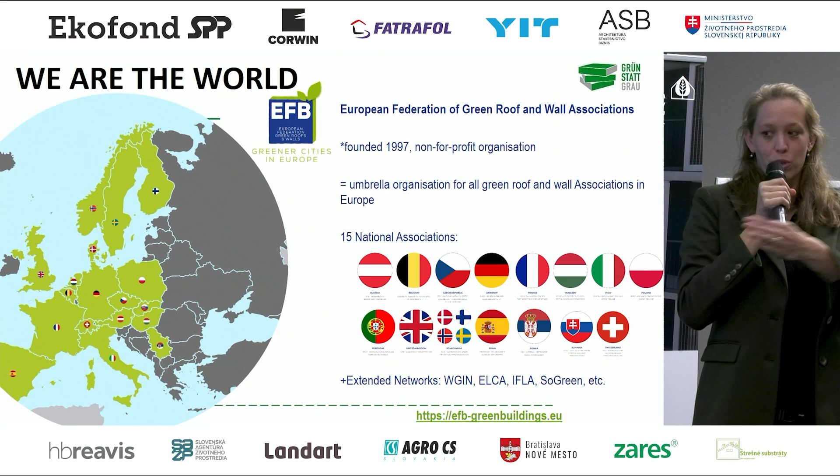So we're representing the Austrian-wide network and coordination center for greening buildings. Beside that, we are also the office for the EFB, which was already mentioned by Dusty before. We are represented in 15 other countries with the European Federation, and we do a lot of exchange, like we've already experienced here with the standards and the certifications and events and so on.

Some highlights of the achievements of GRÜNSTATTGRAU. Looking in the past, the Austrian Association was founded almost 30 years ago. The European Federation almost 25 years ago. Our first green roof standard was published in 2010. Currently we are rewriting this standard to implement green roof standards for biodiversity green roofs, solar green roofs, and a lot of things changed or developed in the last 10 or 12 years.

We are currently working on that. In 2017, the indoor standard came out, and last year we published, with the Austrian Standard Institute, the first green wall standard. As far as I know, we are the first ones in Europe, but also in the world.

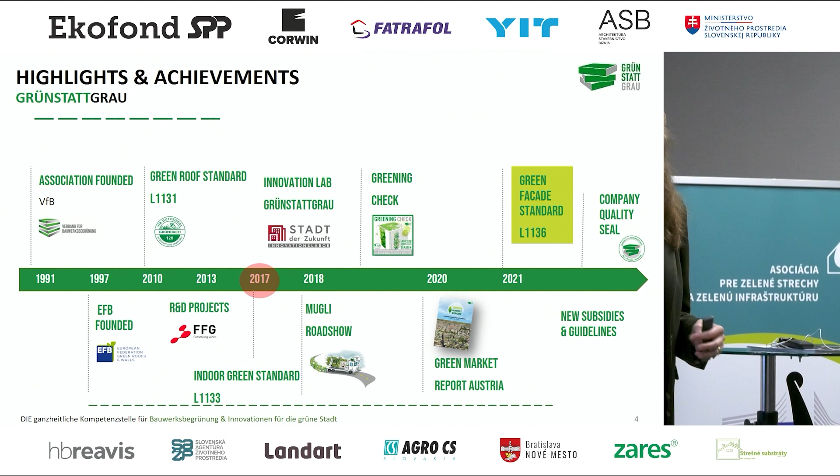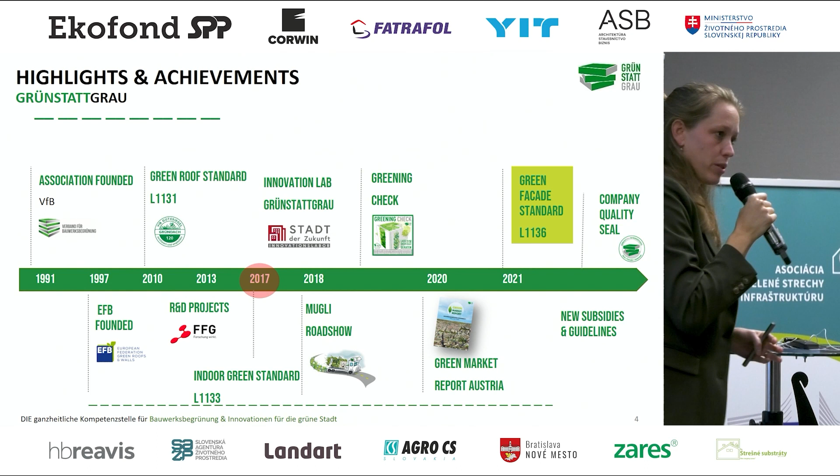Pavel already mentioned it, we started to have a look at our green market in order to provide decision makers with data, to show them that the green roof sector, the green wall sector, is actually actively doing something for climate change adaptation.

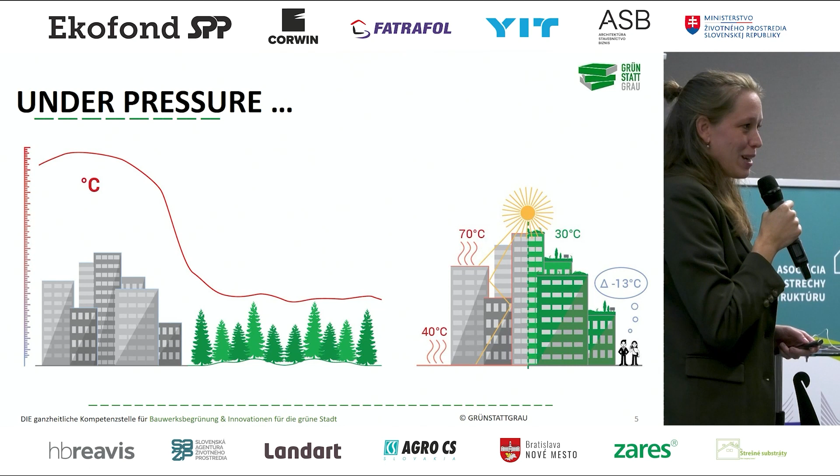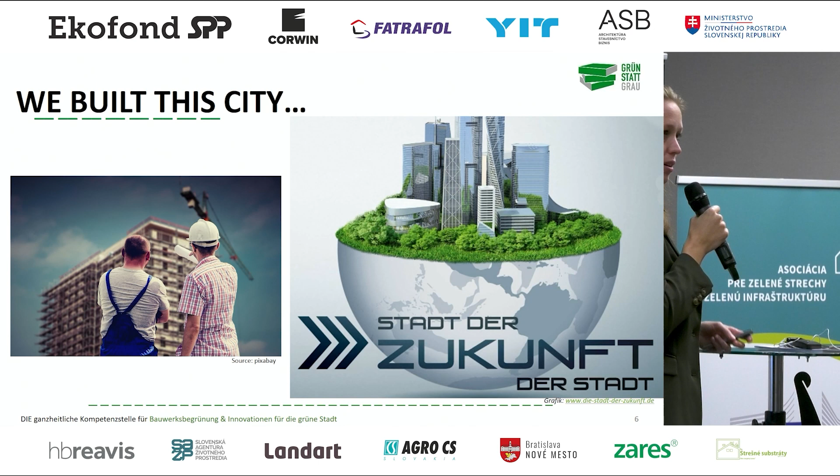As we know, we are a little bit under pressure, and all of you might have experienced it already, and I don't think I have to tell you all the benefits and effects of green roofs. But it's always others who did it. We built our cities, we created our own desert with black surfaces, with a lot of glass, with sealed surfaces and reflecting surfaces.

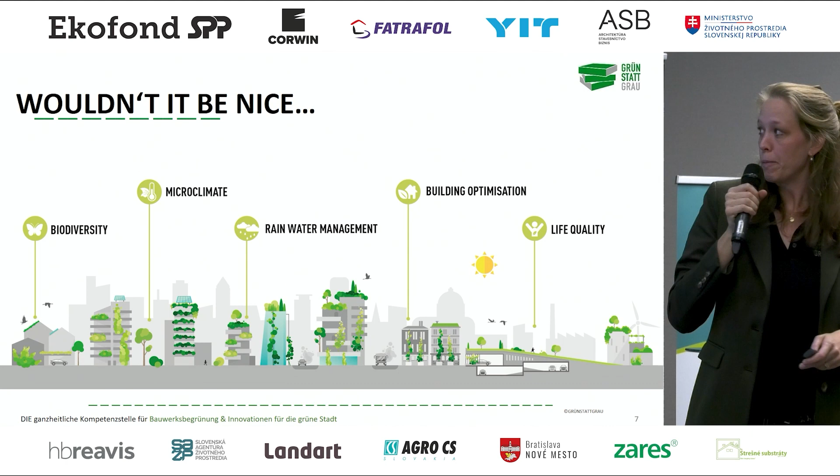So we turned our cities more gray than green. Wouldn't it be nice to bring all these green benefits we can have from nature-based solutions, from green-blue infrastructure, to our cities, to bring back biodiversity, microclimate, enhancing our microclimate, use it for rainwater management, and of course protecting our buildings to optimize the outer layer of a building.

And who else... we are always going to the parks to release our stress or going away on the weekend. So why don't we put the green into our cities, to the place we are living, where we are working.

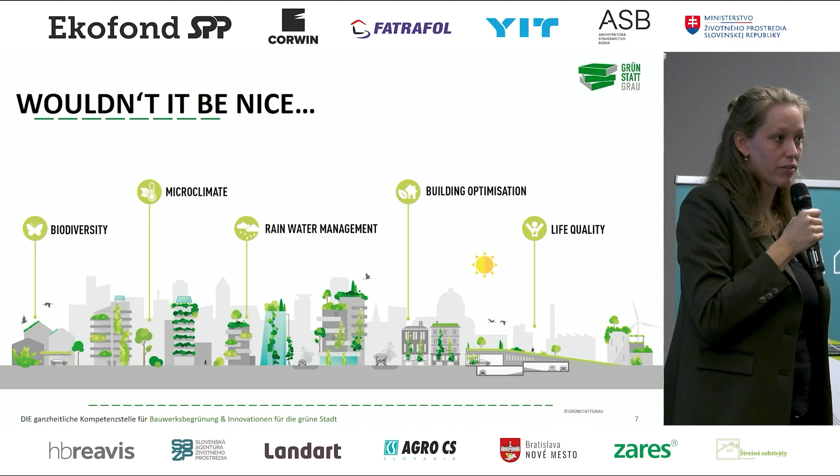And the summers are getting hotter. The prognosis is that heat days will double within the next 100 years. So, hot town, summer in the city.

We have already measured a lot. There are a lot of studies done in the last years, and we can see clearly an effect on how we can cool down with green walls and streets.

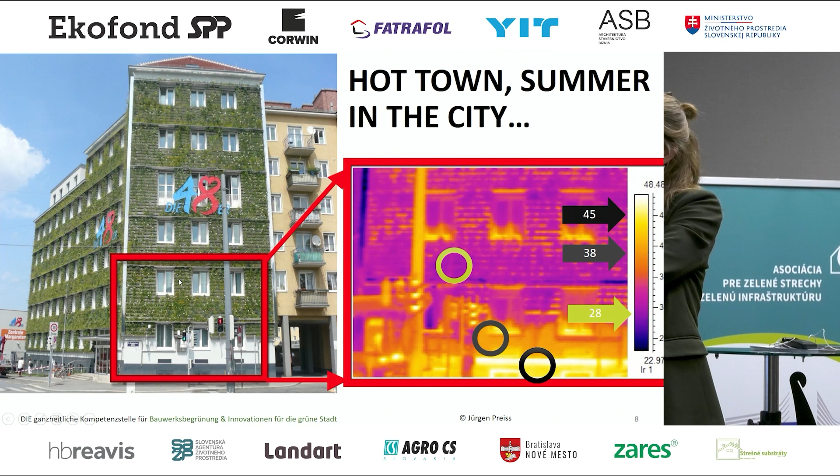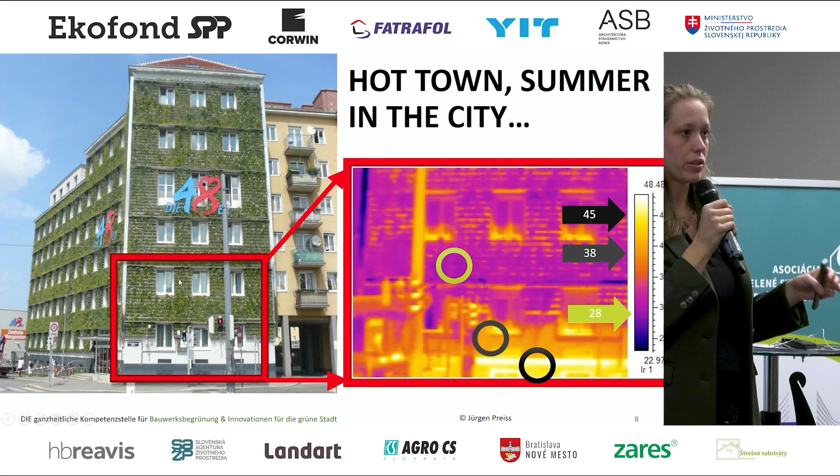The white facade also had a temperature of 38. So you can really see the impact that a surface, the color of a surface, can have on the heat island effect in a street.

And of course, it's all about the money. Here's a study done over 6 years in Berlin by the Technical University. They had the focus to decentralize the rainwater management and bring up green facades. They put on the facade 150 plant pots with 9 different climbers.

They had a direct comparison of an area where the building was shadowed by the climbers, by plants, and with a normal shadow rouleaux, which you can see here. The outcome of this 6-year study was that the running costs of the naturally shaded part of the building were way lower than those of the normal shadowed part.

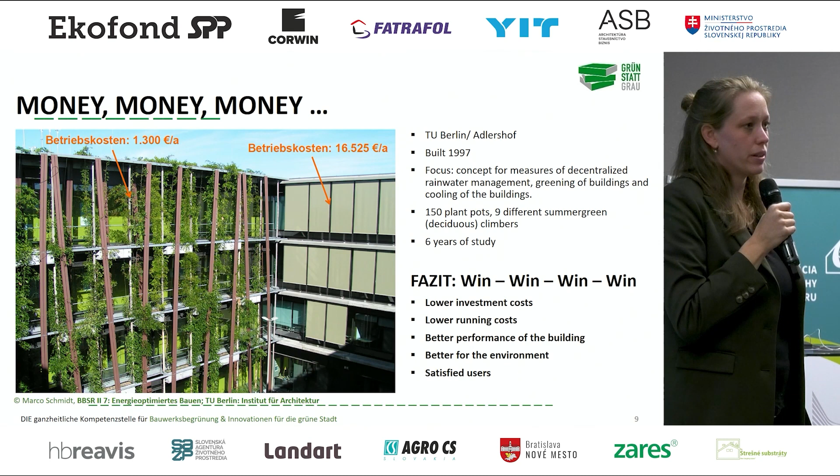So they had lower investment costs, lower running costs, better performance of the building, and of course it's better for the environment, and you have happy users inside and in the surrounding of the building.

And how will you know all of these benefits? We have summarized them all up in a document. It's in German, unfortunately, but you might guess or use Google Translate. They are all on our website in our download area. I have, I think, 2 copies here.

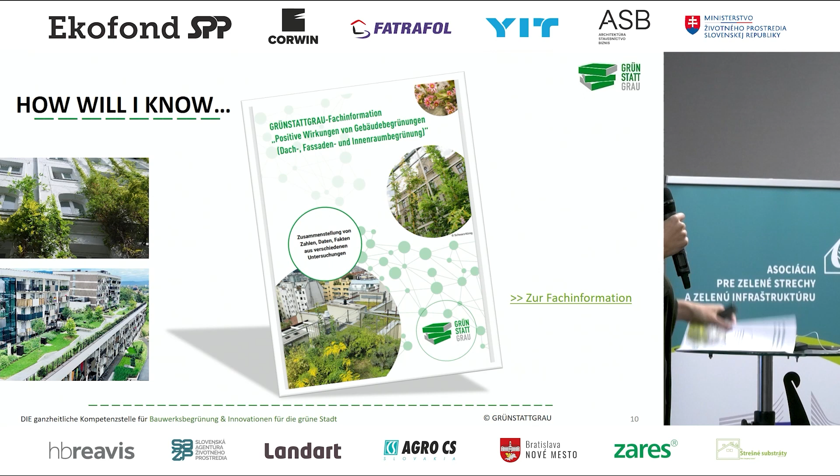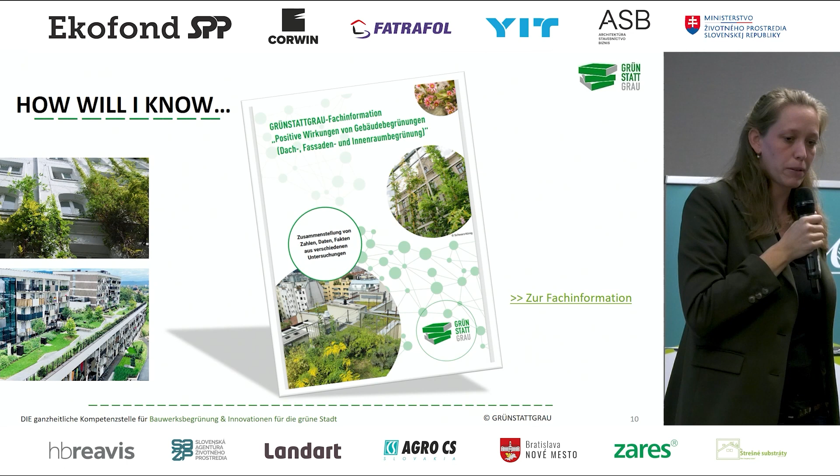So it's a nice overview about all the studies about green roofs and green walls, and also indoor green, which were done in the last years.

And of course, there are already a lot of people who are motivated, and they are doing something already. Some projects are coming to us because they need some help, or it's not working. So when you're planning green walls, it might seem complex at first, but if you have a short look at some technical stuff, or at what the plants need, then you don't have to be afraid of it.

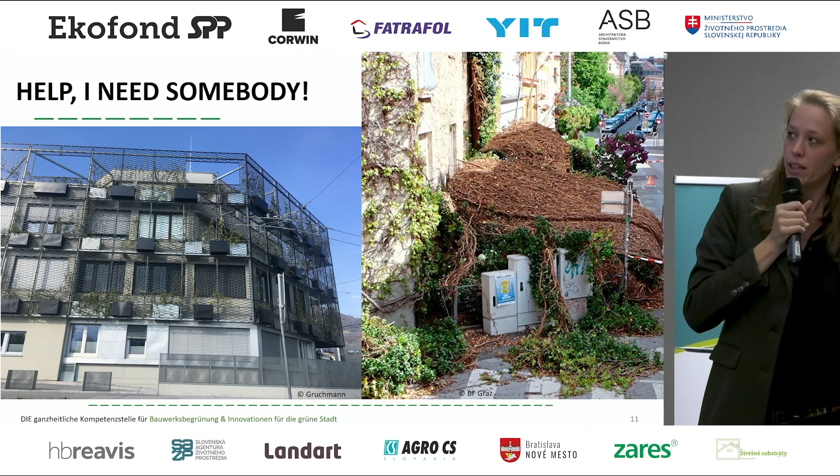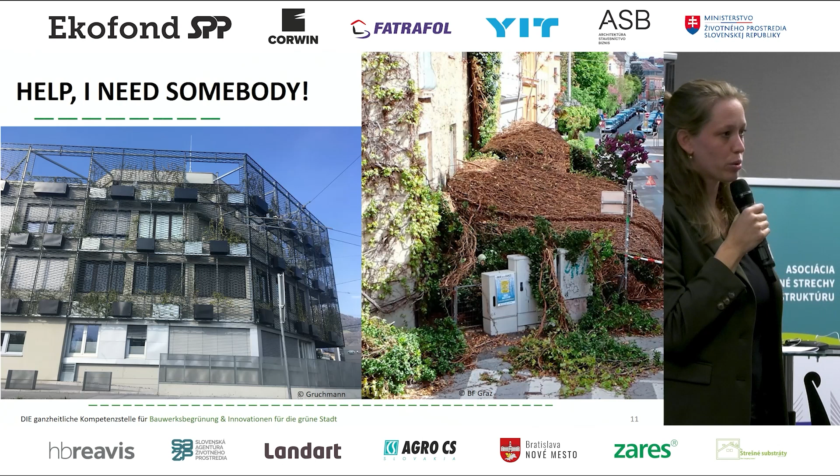But as we can see here, ivy—I'm sure you know the plant—is a plant you have to be a little bit careful with. It's avoiding sun, and it needs the facade, so it doesn't need any climbing trellis or something like this. Or if you do the maintenance wrong, you can have it all down on the street as well.

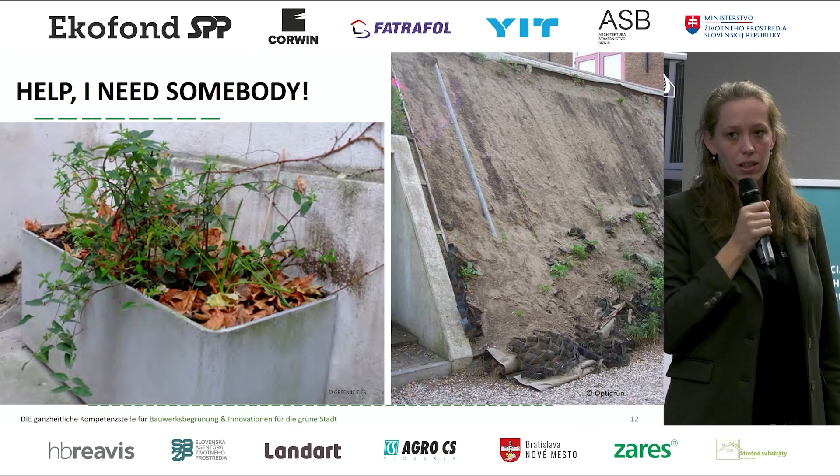And the lack of quality, or the wrong processes at the construction site—I'm sure you know it from green roof constructions—it's really important to have a look at the needs of the plants. Otherwise, they might think that we don't care about them. So you don't have to invest in a climbing trellis when the plant is a self-climber.

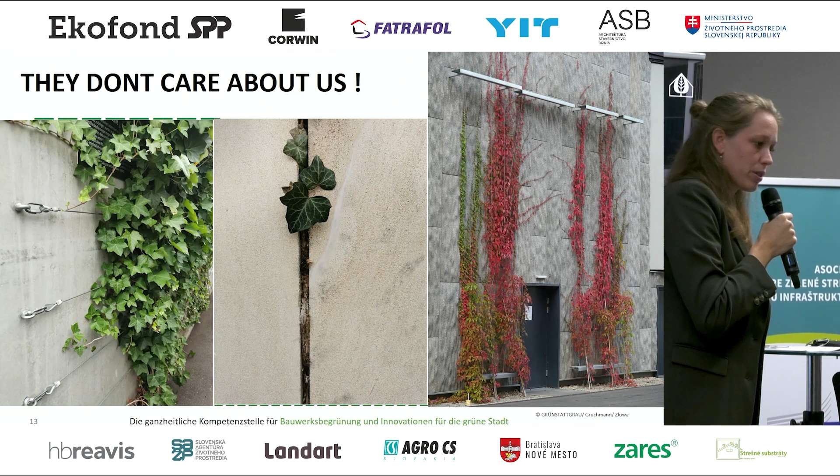There are also different species of plants you have to consider when you choose one. And the ivy, I come back to it.

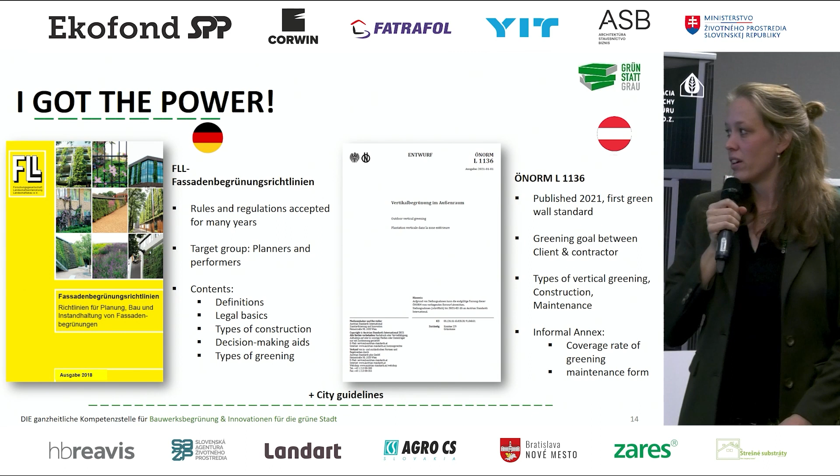So we've got the power, we have the standards, and I'm happy that you also have the green roof standards here now. And of course, there are a lot of city guidelines already existing about green walls, but also green roofs.

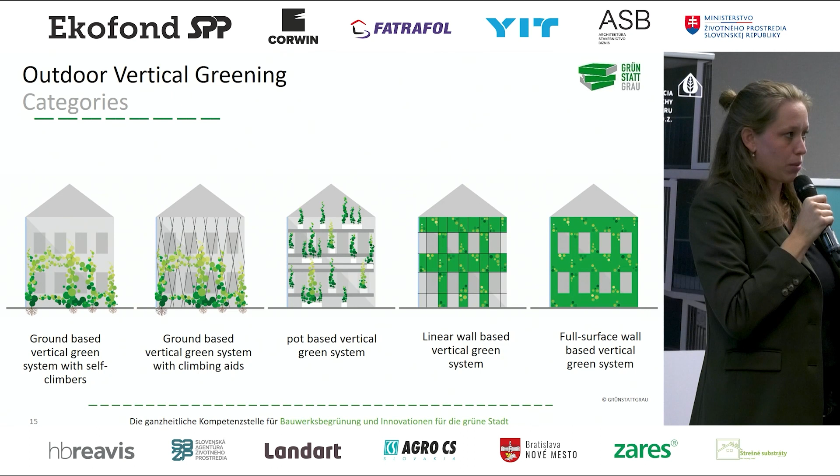So in Austria, we put them into 5 categories. We divide them into ground-based with self-climbers, ground-based with climbing trellis, pot-based green walls—either in the soil, on street level, or on the building—and wall-bounded systems, where we divide into linear and full-surfaced ones.

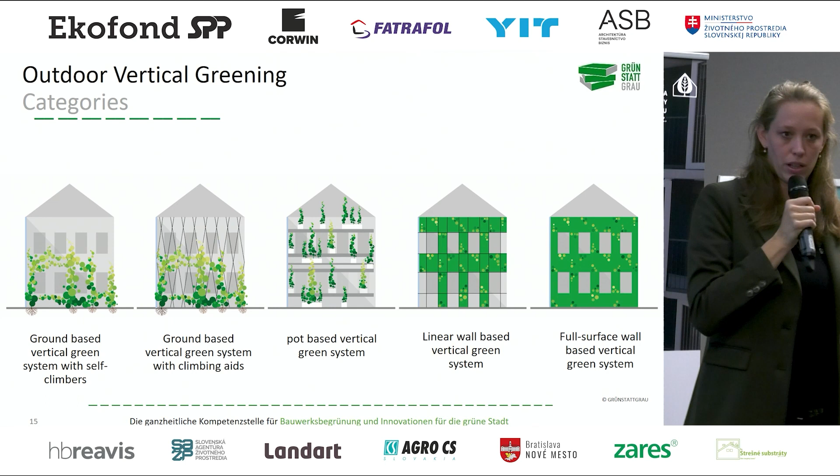So if you want to start your project, you have to check it out now before you start: what kind of space you have available, who is the owner of the building, is it also on the street side, do we have to involve the city, the exposition regarding rain, wind, sun, etc., the fire regulations.

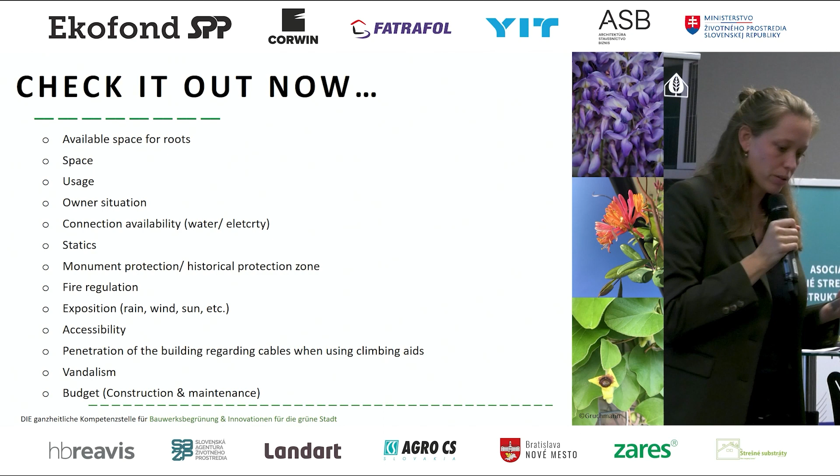In inner cities, you also have to face or check the monument protection if you're in a historical zone. The statics, of course, and whether any connections for irrigation, water, or electricity are available, or if you have to install them.

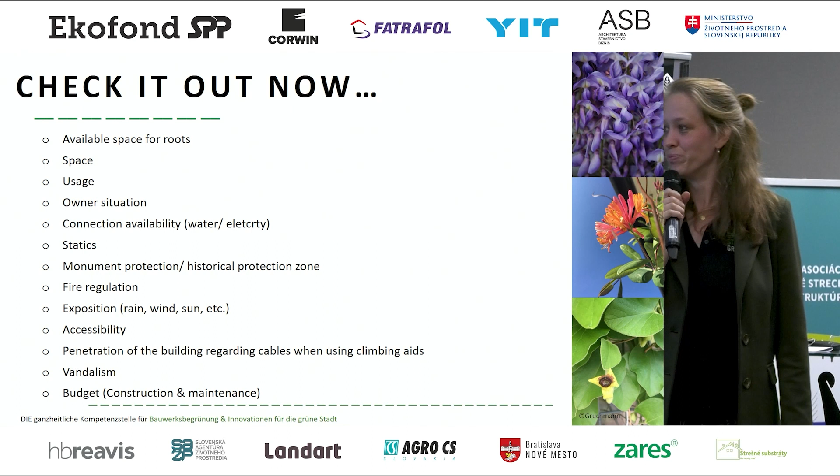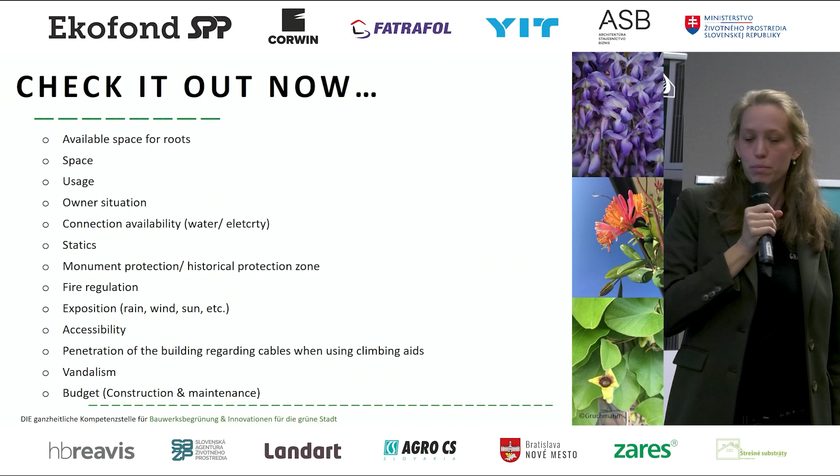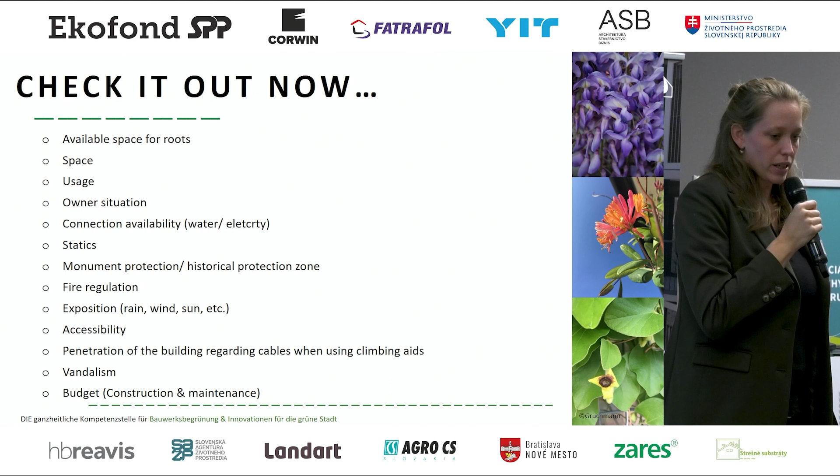For some places, you also have to consider vandalism. For example, at schools, they treat the plants differently than maybe on your house. There's also the accessibility, which can cause higher maintenance or costs if it's quite complex to get there. And of course the budget, either constructing or maintenance. Depending on these factors, you can choose your system.

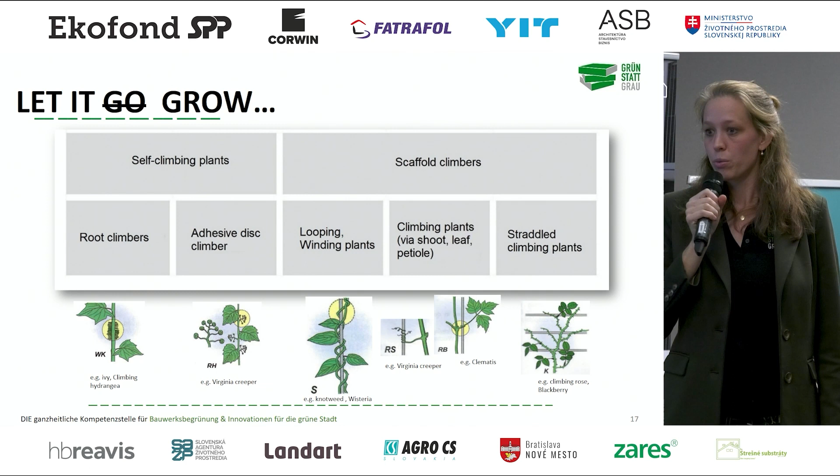One of the most used, because it's also low budget, is working with climbers. We divide them into self-climbers and those who need a climbing trellis. There are further categories depending on their growing habit, and you have to choose the type of climbing trellis, whether it's a rope, a net, or something else.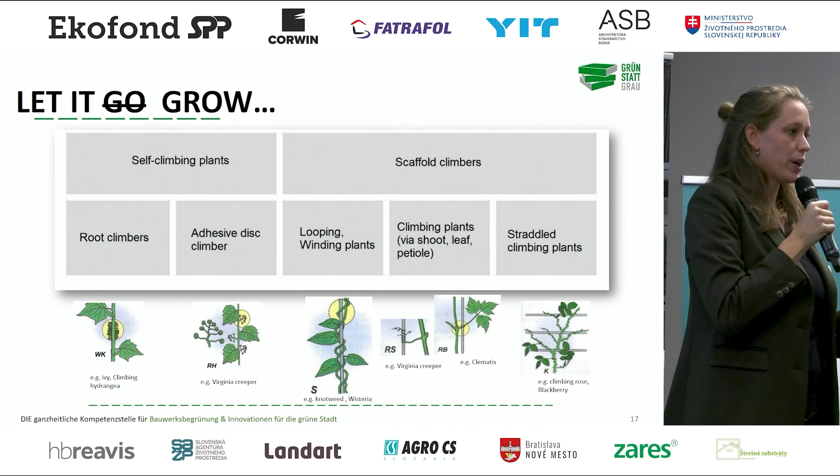And ain't no wall high enough. You also have to consider or be assured what your greening goal is, how high the plant should grow, and carefully decide what kind of plant you will use.

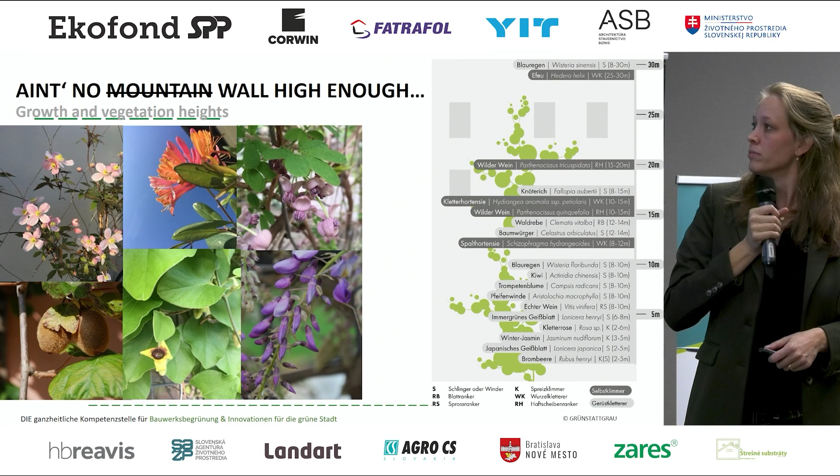Here we have an example from my hometown, Salzburg. It's ivy again, well maintained, shaped in a heart. They really love green facades in Salzburg. But you also have to consider that ivy loves dark places, so if you don't regularly check your ivy at home on your facade, it can cause damage because it loves cracks and grows inside them. But it's ecological — it's really an amazing plant, because you have birds nesting, blooming for the bees, and food in winter for the birds.

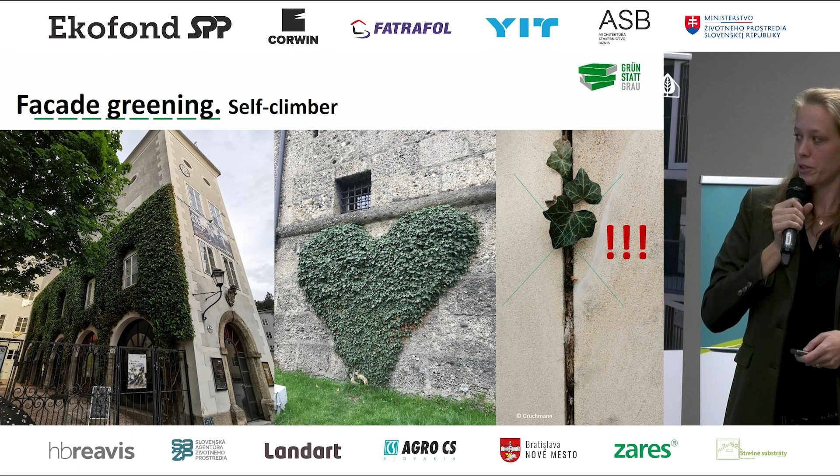Here we have an example from Vienna. In Vienna, you also get subsidies for installing green walls. First you get 200 euros for consulting, then up to 3,000 euros maximum for inner yards, and 5,000 for street-side facades. In Vienna, new buildings have to have 20% of their facade covered in green.

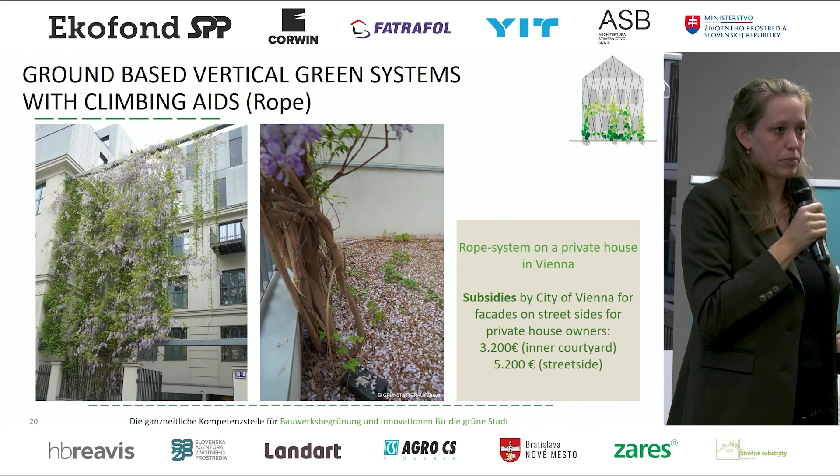Then we have this kind of plant pots. You might know it from your balcony — in autumn when you remove them, you put it out and you have a really compact shaped soil in your hand. So it's really important to use mineral, pot-friendly substrate. The layers are done like a green roof, and it has to handle heat and root pressure with plant-friendly substances. In case you want to optimize water retention in the substrate, we have geotextiles or other additional substances.

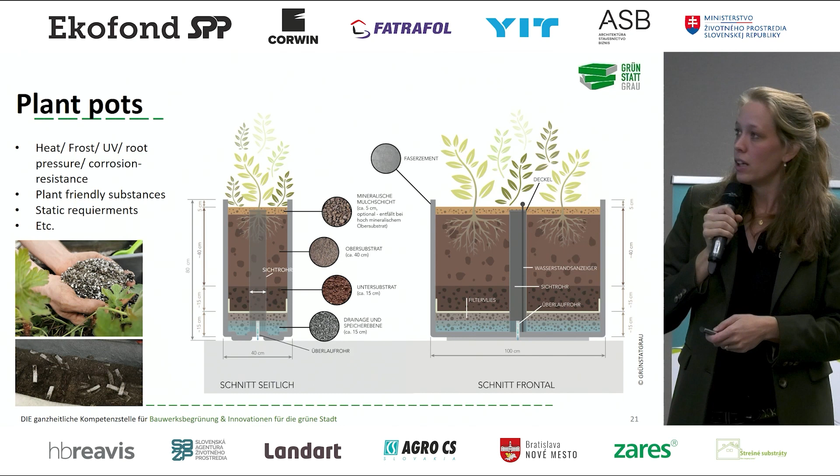This is actually a project where we sit together with the city of Vienna. We invited all departments who are involved, because if you want to set up or install a plant pot on the street side in front of your house, the process was really complex and no one wanted to give their signature on the paper. So we sat together, asked them what their criteria were for the plant pot, and developed the greening quality assurance. The different departments worked on optimizing the process.

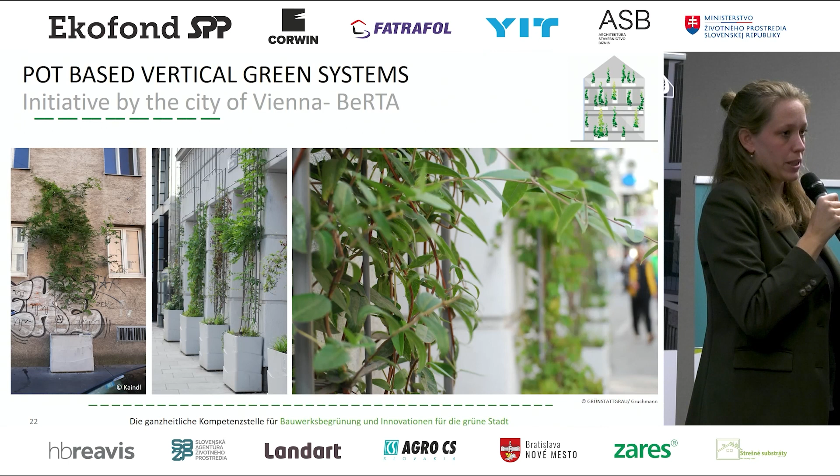At the moment we've developed a one-stop shop where, if you're interested, you can apply — we call it BeRTA, the plant pot. It's a very easy and fast process from having the idea to actually installing it, and we also provide all the planners or gardeners who install and maintain it. Here's another example of a pot-based green wall, showing how architectural design can be implemented in the climbing trellis. Tomorrow I will also show you another pot-based example where they put it up — there was no space on the ground level, so they put it up on the wall.

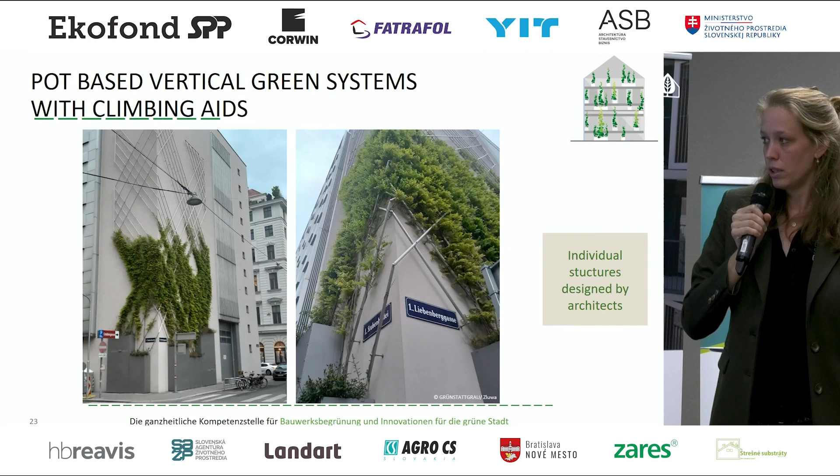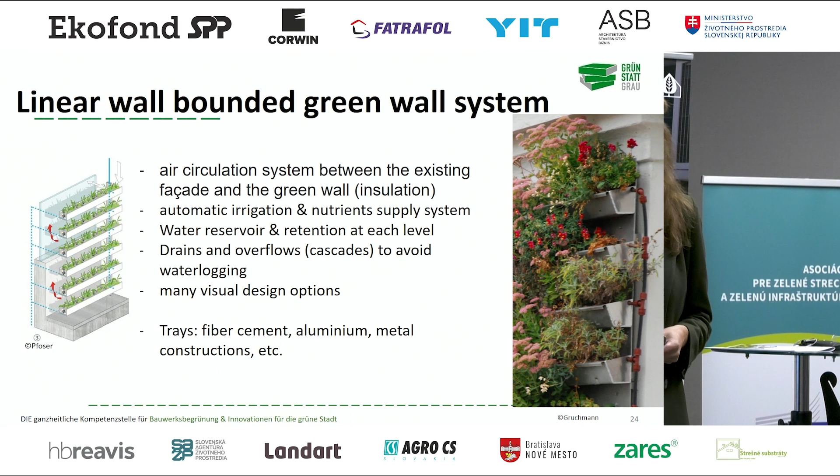Another technology is wall-bounded linear systems. They often work like cascades, so the irrigation is automatic, and nutrients can also be provided through the irrigation system. It's like a second facade, so you have an insulation optimizer, and you also have to consider what kind of plants are in the upper and lower parts of your system, because the irrigation runs through it like a cascade.

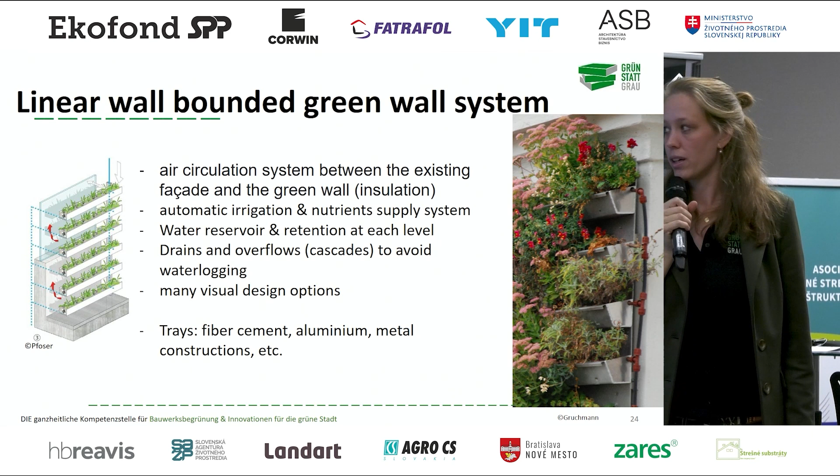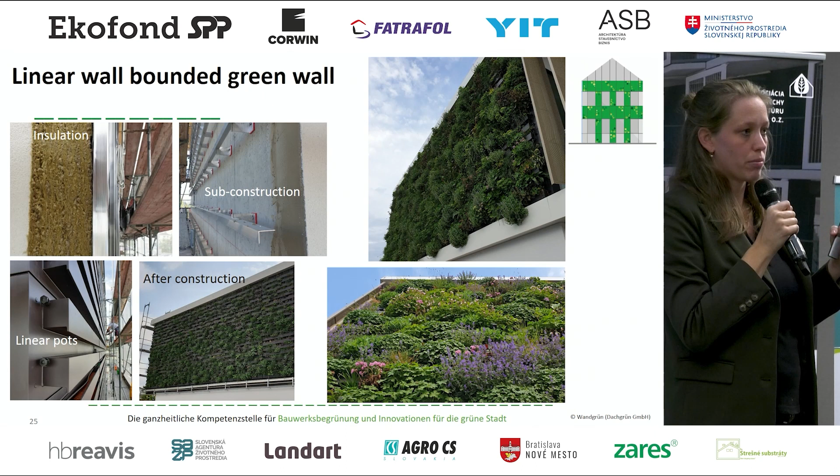The trays can be made of different materials like fiber cement, aluminium, or metal constructions. Here you see an example of how it's installed: you have the sub-construction, then the linear pots, and then after construction it's already ready to hand over. After several months, on the right side at the top, you can see how fast it's growing. In this case it's with substrate, and you can also use self-seeding plants — here they wanted a very pollinator-friendly green wall.

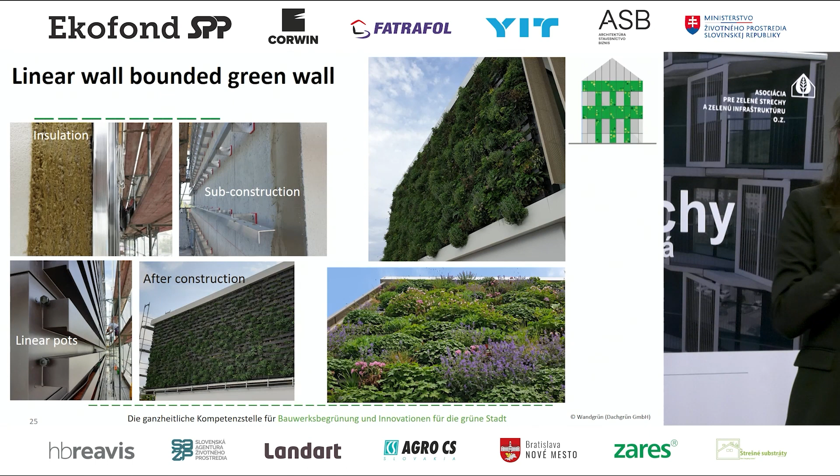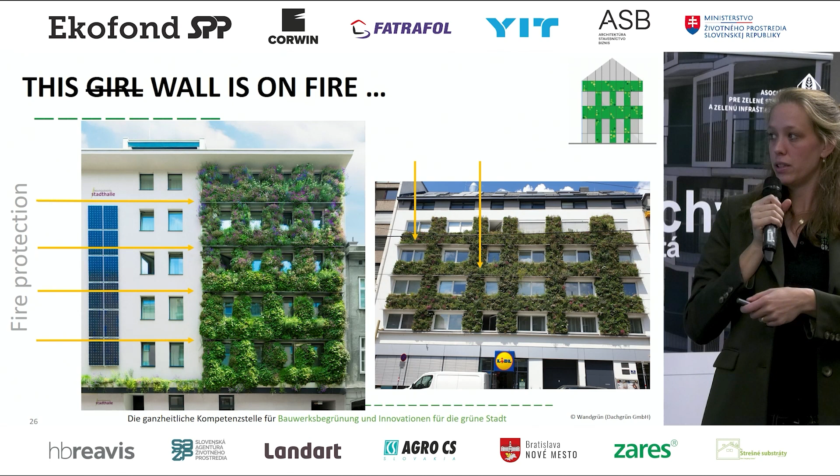Yeah, this wall should not be on fire. So in order to avoid fire passing, in Vienna it's quite strict and very intensely discussed by the city of Vienna. So we have to install this kind of fire protection above each window. You can also see on these pictures that here we don't have the gap of 1 meter to the attic, and a few years later the city of Vienna is saying you have to keep a gap of 1 meter to the roof.

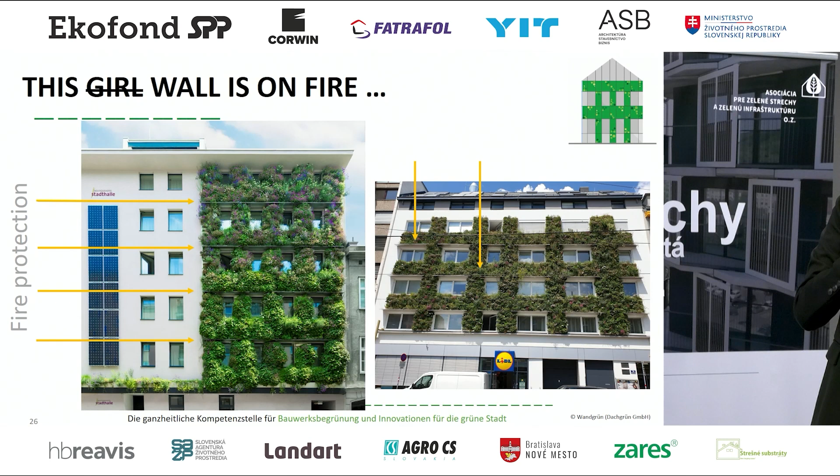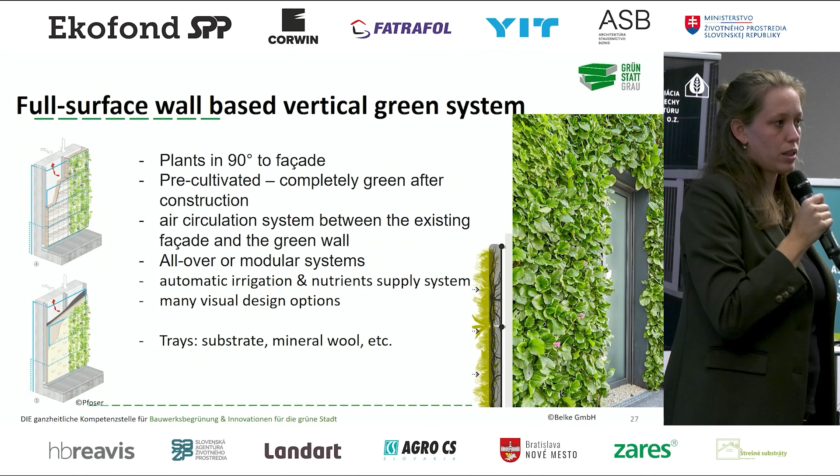And then last one, we have this full-surface wall-based vertical greening where the plants are at 90 degrees in the systems. They can also be modular, and they are mostly pre-cultivated, so after the installation your facade is fully covered in green, and you have already reached your greening goal. They are a bit expensive in the installation, but you have your greening goal immediately. And the trays can be substrate or also mineral wool and other things.

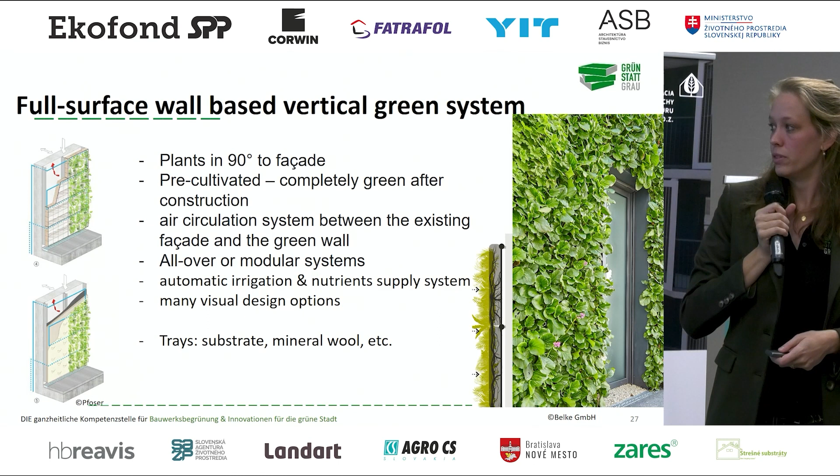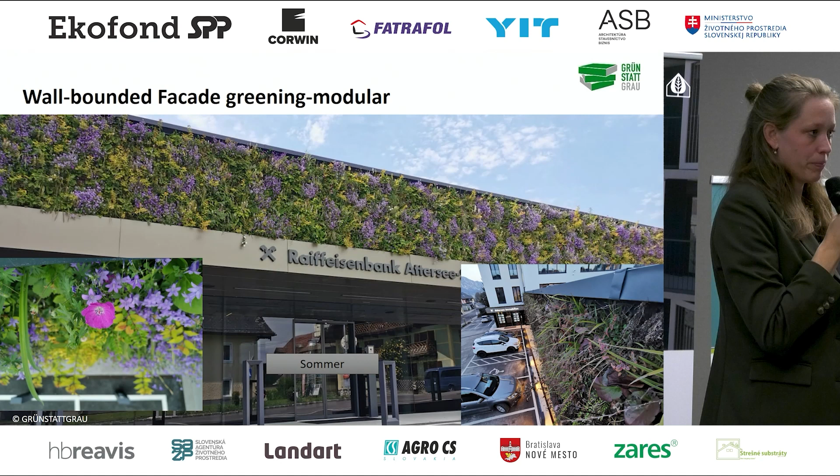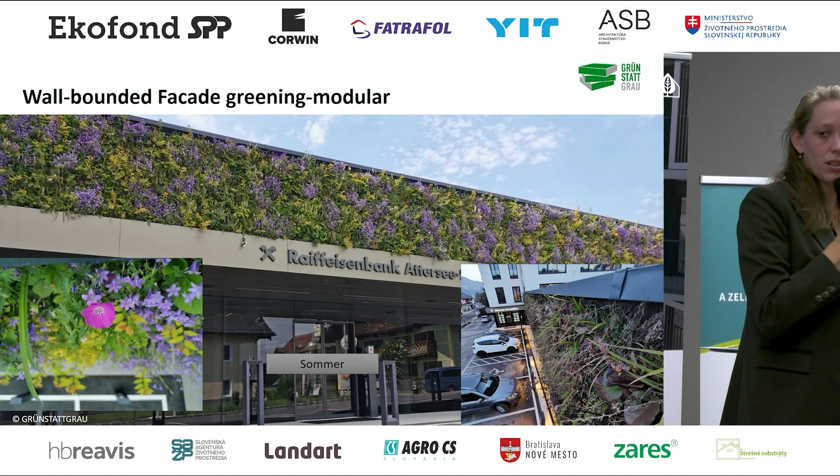So here you can see a bank who has money to invest in it. It's very nice. They also have a lot of pollinator-friendly plants, and especially these kinds of wall-bounded green walls, these living walls, they are also very nice even in winter, because when working with climbers, you can use the solar energy on your facade, but it doesn't look really nice - you have these branches and so on. Living walls have a really nice structure, and they can be designed with different types of grasses and other plants.

So it's also similar to the linear wall-bounded facade greening, and the one we saw with the pollinator-friendly plants is maintained once a year, at the end of March, beginning of April.

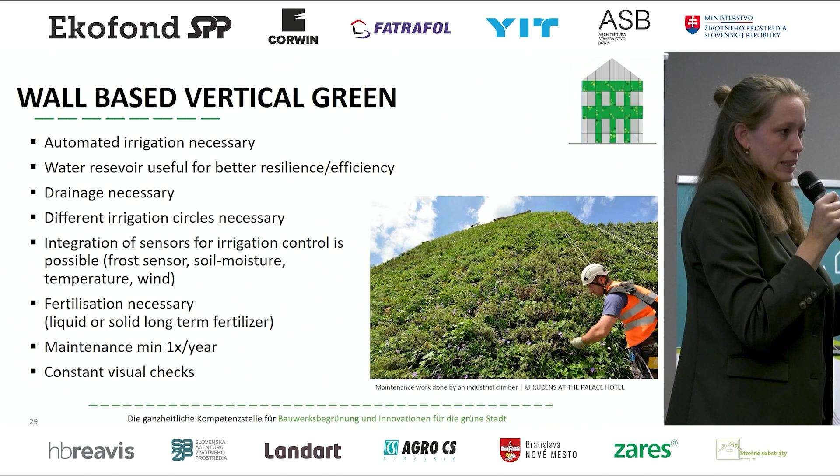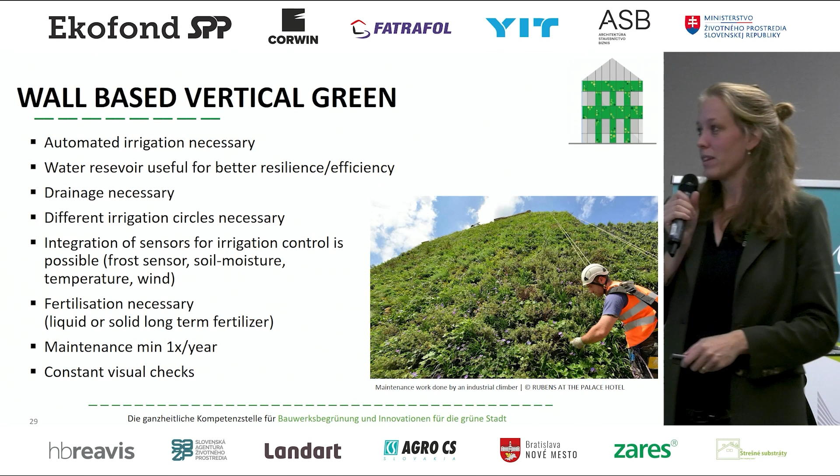And of course, you also have to be aware of the irrigation - if the irrigation system breaks down, or there's an emergency call for it, you have to make sure that the person who gets informed is not on holiday. So the process of the information flow is also important to define.

And what we are also mainly trying to achieve is that the right experts should be involved right from the beginning of your planning. It's often very hard to implement things if they're already decided. It's possible, but can become more expensive. So involve planners, architects, engineers for the installation, gardeners, and the facade engineer, the metal workers.

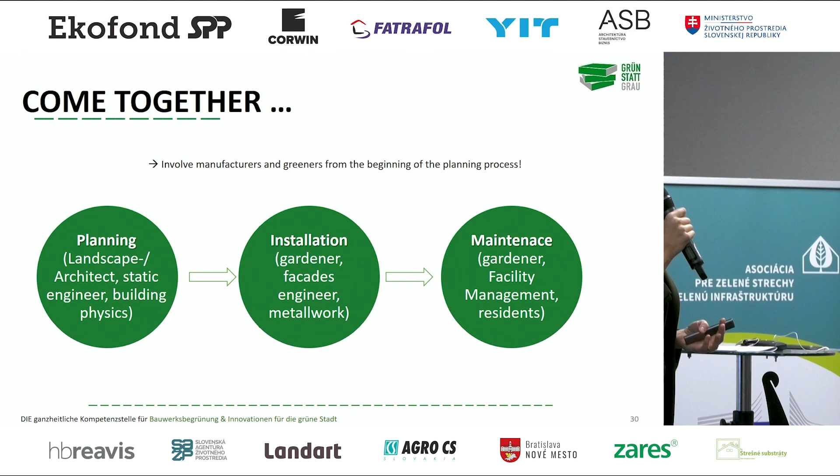And for the maintenance, we always suggest asking a professional. Sometimes there are concepts where you can also hand the maintenance over to the people living there. There are really nice examples in England where this works well.

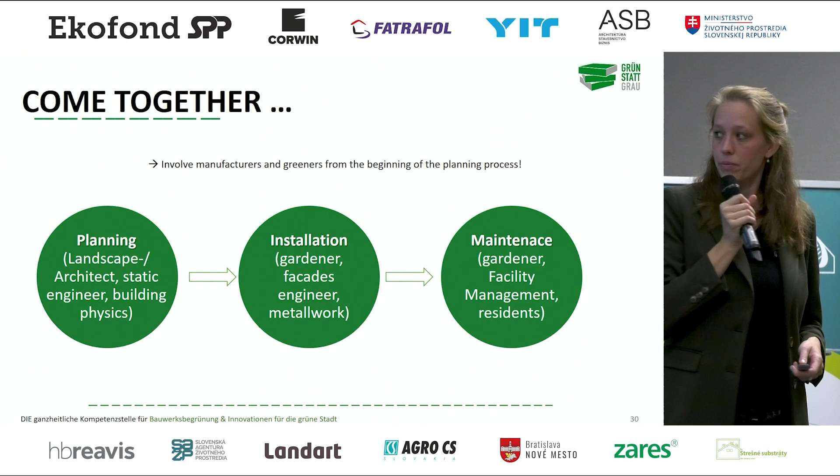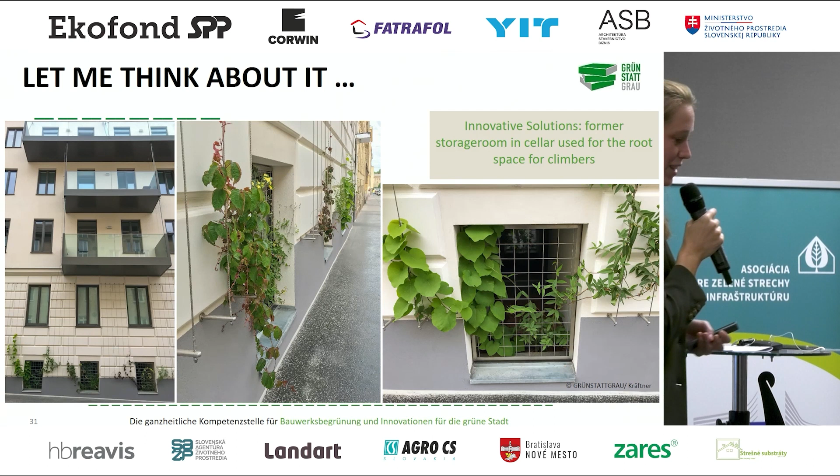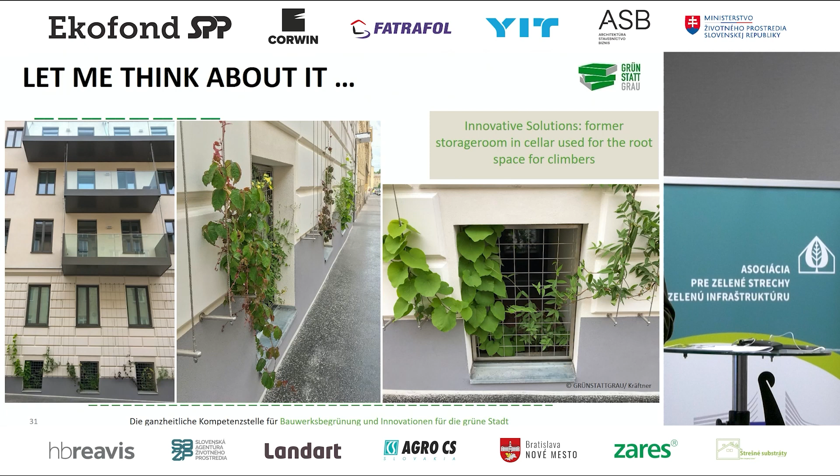And you can also think about new ways. We hardly say that there's no solution for a green wall, but you can also think differently or innovatively. So in this case, a real estate manager asked us how he could put a green facade on it, but at the ground level there was no space for any pot or anything, or to open the surface. In Vienna we have these old houses where you have cellars, with irrigation, water connection and electricity already there. Mostly they are not used because they are kind of moist. So in this case we tried to put the root area into the cellar, and it's working quite well.